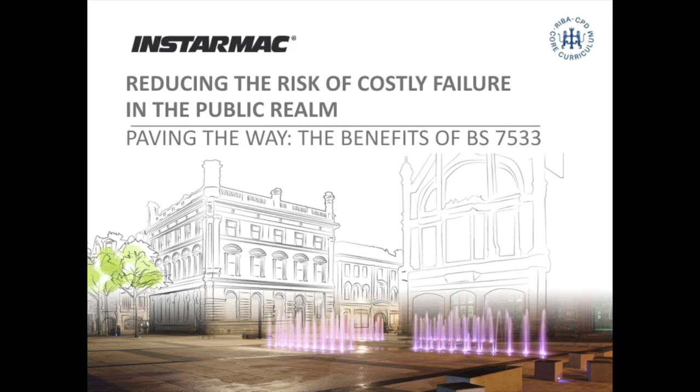Firstly, thank you for your time and welcome to this Instarmac CPD, reducing the risk of costly failure in the public realm, paving the way, the benefits of BS 7533. This seminar is intended to offer an overview of the benefits of using the British Standard 7533 for the design and construction of rigid or bound pavements in public realm works. We shall look at examples of high-quality paving where BS 7533 has been used successfully, and shall also illustrate some of the problems resulting from poor design or construction.

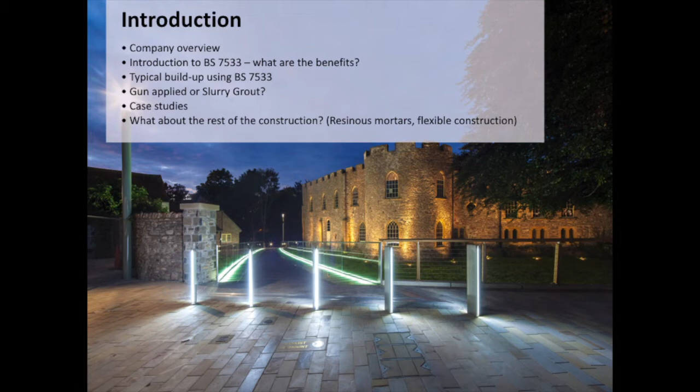We will review the basic principles of the standard and the guidance it provides for designing and constructing your paved area. We shall also look at some of the other considerations which can impact on the life and quality of your public realm construction.

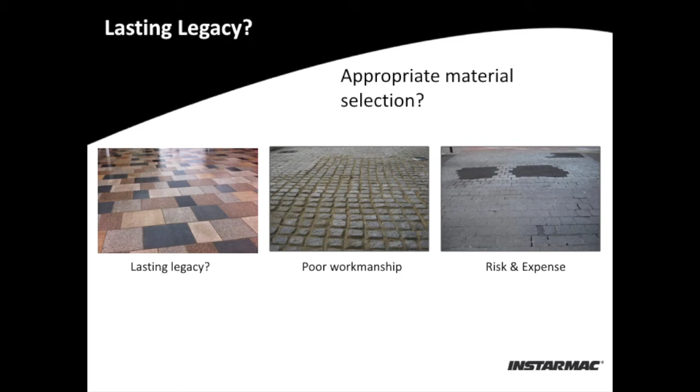BS 7533 has developed over approximately 20 years to offer clear, consistent and tested methods of design and construction. It offers advice through all layers of the construction, not just the mortars, and provides a tried and tested methodology for designing and constructing rigid paved areas. This ensures that your professional indemnity insurance is protected from risk and uncertainty. The British Standards Institution was founded in 1901 and is trusted throughout the world.

The British Standard 7533 compliance removes the uncertainty of site-batched mortars and offers a minimum of 40 years construction life. It can be used to design and build schemes in excess of 1,000 standard axles per day. Designing and constructing using the British Standard also helps protect your professional indemnity insurance.

Although the initial outlay may in some cases be lower, the ongoing and life cost of a non-compliant construction is generally significantly higher. The British Standard offers tried and tested guidelines and as such helps to reduce the risk to your professional indemnity insurance. This is not the case when using non-compliant materials. It offers a minimum 40-year construction life. Non-compliance cannot offer any minimum life expectancy.

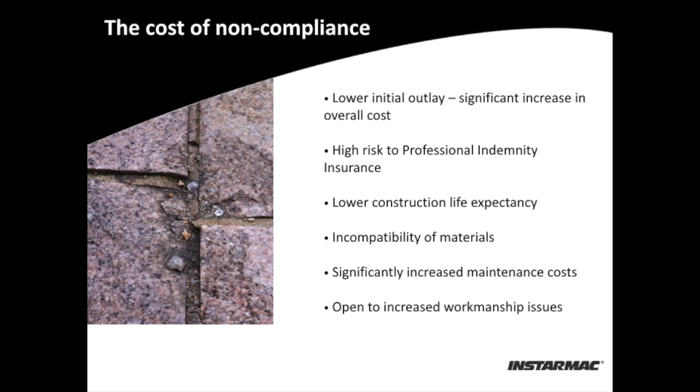One of the often overlooked aspects of the British Standard is that all the materials are tested in conjunction with one another, ensuring they work in harmony. A lower life expectancy also means an increase in ongoing maintenance, which can significantly increase the life cost of the construction. The British Standard provides technical and practical guidelines, which ensure that potential workmanship issues are minimised.

The only way to be certain that the products selected are compliant with the latest version of the British Standard is to ask for independent test results showing all aspects of Table C5 from a United Kingdom accredited service, commonly known as UKAS laboratory. Without independent verification, you may not be getting what you pay for.

It's important to understand the way some manufacturers will try to subvert the requirements of the standard, using claims such as manufactured to meet or manufactured in accordance with. Instead, look for certainty. For example, fully compliant and independently tested. The requirements of the standard are extremely strict and difficult to meet. Another strong indication that products you select are going to meet your requirements is to see some tried and tested results.

Cement production is a significant contributor to CO2 emissions, at approximately 750 kg of CO2 per tonne of cement produced. After water, concrete is the most widely used material worldwide, so any reduction in the impact of cement-based materials is positive. With this in mind, using BS 7533 is particularly relevant, given the extended life you can expect over more traditional build methods. A recent scheme in Wiltshire using BS 7533 compliance and eco mortars achieved a CEEQUAL Excellent Award.

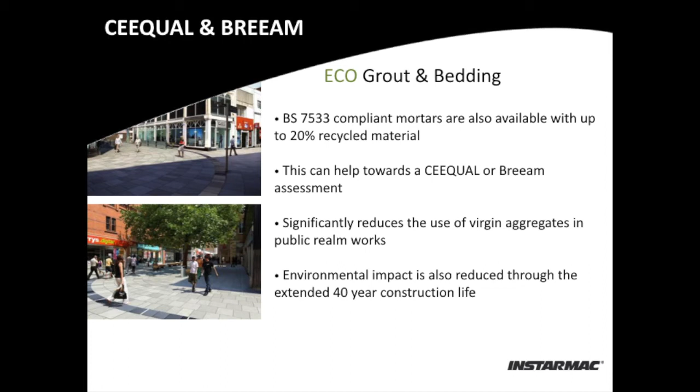CEEQUAL is the International Evidence-Based Sustainability Assessment Rating and Awards Scheme for civil engineering, infrastructure, landscaping, and works in public spaces. The subgrade is the bottom layer of the construction upon which the rest of the construction is built.

The capping layer is MOT Type 1 or DOT Type 1, DTP Type 1. Roadstone is installed as a consolidating layer above the subgrade to construct the road base, subbase upon. MOT is a subbase that is formed using recycled crushed concrete and consists of rubble of varying size, from 40 mm right down to dust, also known as DOT Type 1.

The road base, subbase is constructed using either C30 or C40 concrete or dense bitumen macadam. BS 7533 bedding mortar has to be extremely high strength, shrinkage compensated, and must also offer high adhesion qualities.

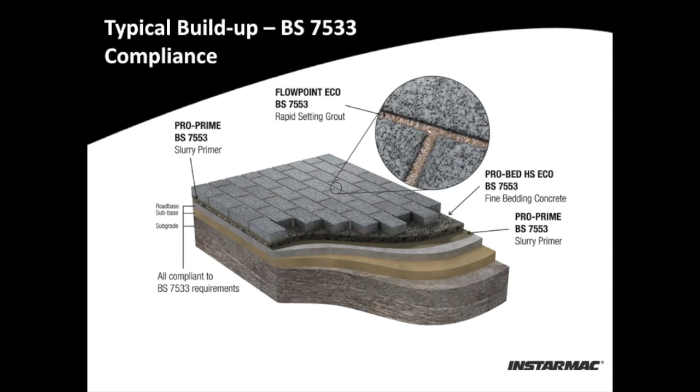California bearing ratio, also known as CBR, is a test used to determine the supportive value of the subgrade. The CBR value determines the depths of the road base and subgrade and ensures it is suitable to bear the load of the construction above. The capping layer is then installed and compacted, providing a suitable layer on which to construct the road base.

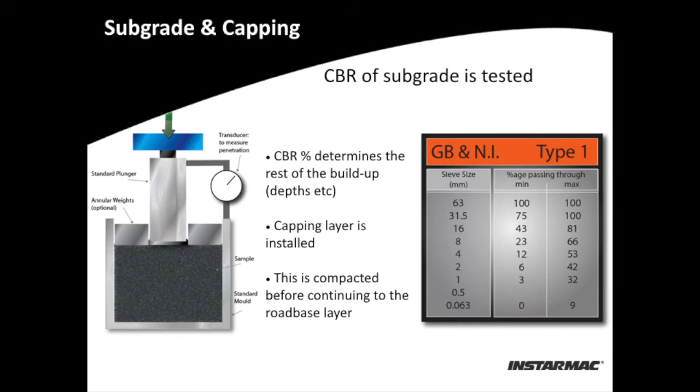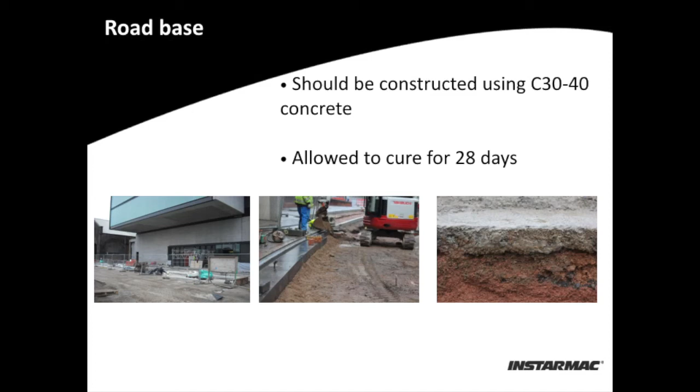The design should be based on an assessment of the subgrade bearing strength, CBR. The weaker the subgrade, the stronger the paving design above should be. Best practice is to construct the road base layer using a C30 or C40 concrete. This should be allowed to cure for a minimum of 28 days. Where this offends either the project program or cost, dense bitumen macadam can be considered.

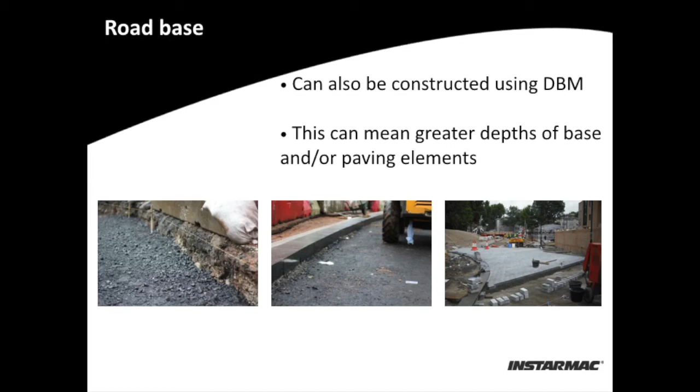Where DBM is to be considered, consideration should be given to both the depth of the road base and the depth of the paving. Although priming of the road base is not a specific requirement of the British standard, it has now become standard practice to prime at this layer. Priming ensures a high bond between the road base and bedding material. Debonding between these elements has been identified as a common cause of failure.

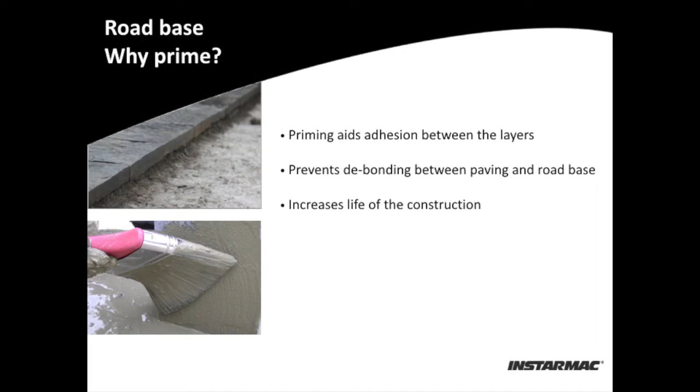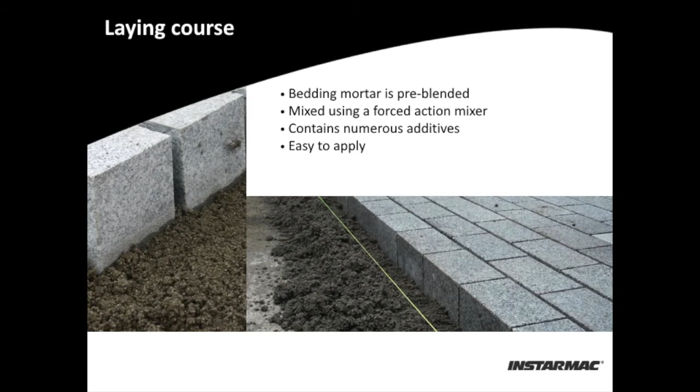The bedding mortar requires just the addition of water and is mixed in a forced action mixer or silo for larger volumes. The numerous additives control shrinkage, adhesion, flexural strength, and workability. Although the optimum bed depth is 35 mm, the bedding mortar can cope with depths of between 10 and 75 mm. Priming of the paving element increases the bond strength to approximately 2 newtons per millimetre squared, as per the latest requirement for compliance to the British standard. This prevents one of the most common causes of failure in public realm works.

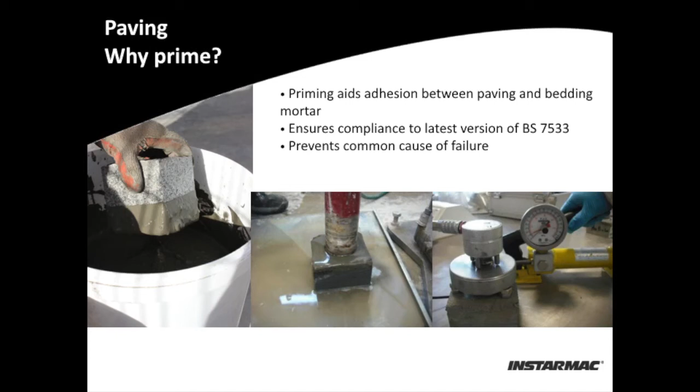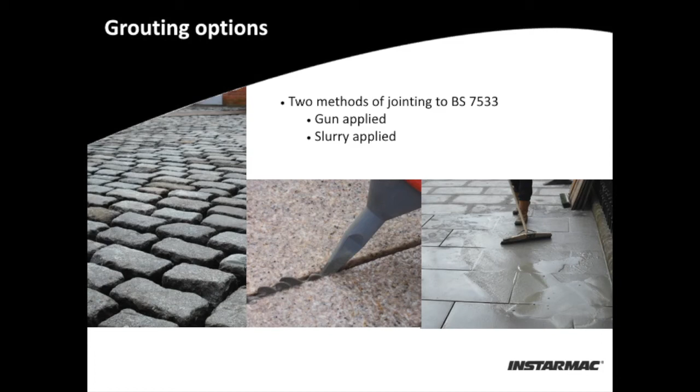There are 2 methods of jointing to BS 7533. The gun-injected method offers a more traditional struck joint finish, but is considerably more laborious. The slurry method is faster, more cost-effective, and more robust. Many clients worry unnecessarily about staining when considering slurry grouting.

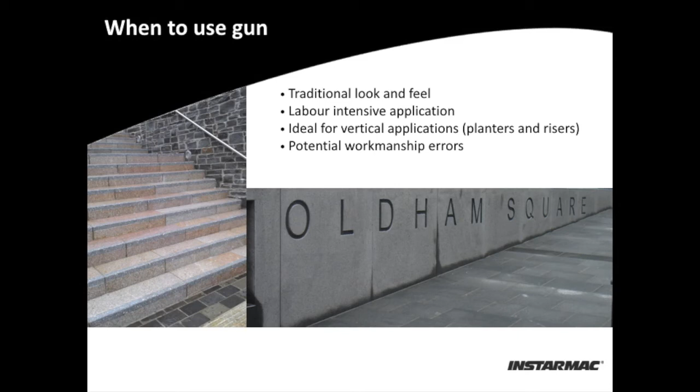Although gun-applied mortars are much more labour-intensive than their slurry counterparts, there are occasions such as vertical applications where it is the product of choice. There is a greater potential for workmanship errors, such as voids in the joint due to poor application using gun-applied mortars, and generally they require a lighter touch than slurry grouts.

Due to the application method, slurry grouting is fast and efficient, meaning large areas can be grouted quickly. Slurry grout can also be applied in less than perfect weather conditions, and its fast setting properties means it can be trafficked more quickly than traditional pointing methods. Voids in the joint, which are a major cause of failure, are avoided because of the application method, filling the joint from bottom to top.

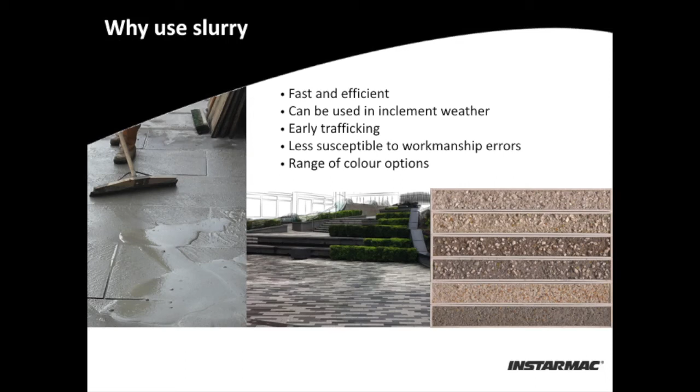BS 7533 is able to cope with extreme traffic conditions. The MOD tanks at Bovington Tank Facility required a surface suited to support upwards of 1,000 standard axles per day. Damaged concrete was removed to allow the installation of a versatile, polymer-modified cementitious mortar subbase. This mortar conforms to the strict demands of the BS 7533 specification for the rigid construction of streetscape works.

The granite setts employed to withstand the exceptional surface impact wear and tear were laid onto the subbase and grouted and secured with rapid setting grout. The high fluid consistency rapid set grout also conforms to the demands of BS 7533 and facilitates early trafficking. In addition to its exceptional bond strength, it has an initial set time of just 30 minutes, can accept foot traffic after 1 hour and vehicular traffic after 36 hours.

The grout, which is also mixed with water on site, is able to fill joint widths from 5 to 50 mm and joint depths of 200 mm in one pour. As part of a follow-up site visit, it was found that although having been subjected to significant impact from an array of heavy-duty army vehicles for more than 4 years, virtually no degeneration had resulted.

One of the largest public realm paving schemes in Europe, the new home of the BBC in the northwest, required approximately 40,000 metres squared of paving. Over 2,000 tonnes of bedding mortar was supplied in bulk silos, which provided a perfect base for the stone to be laid on. Slurry primer and flowable rapid setting grout were also used throughout the development.

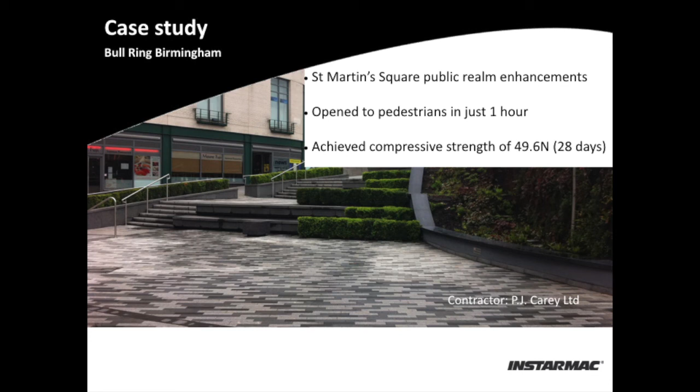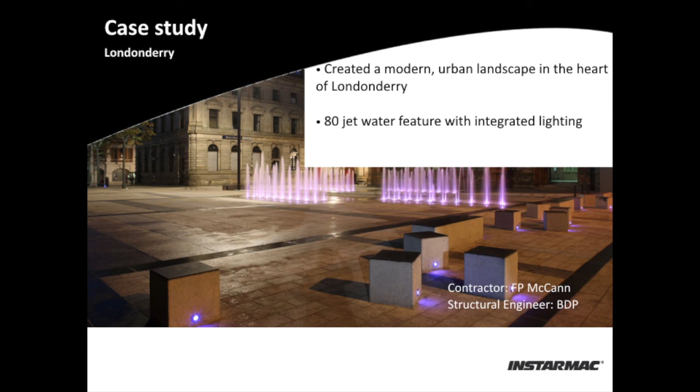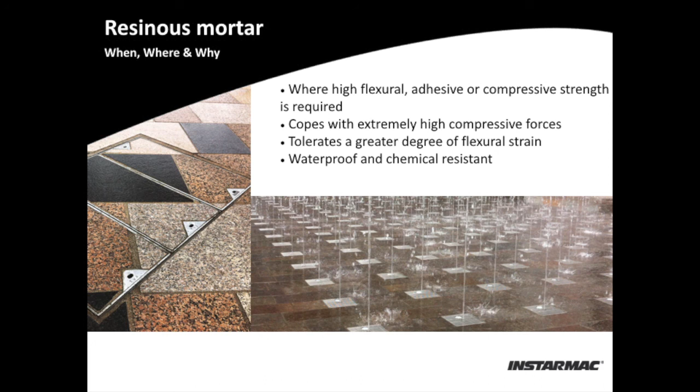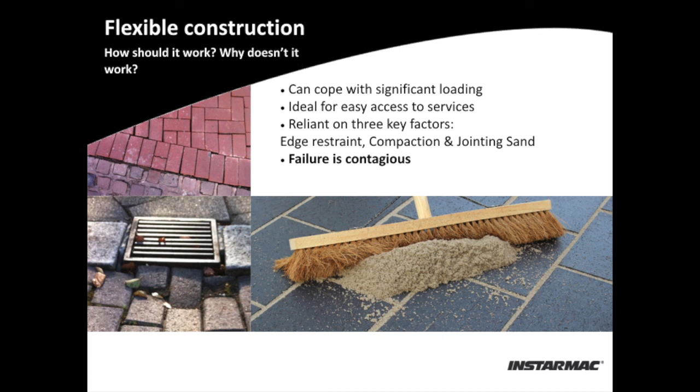Although flexible construction when installed correctly can cope with significant loads, when failure occurs, it can spread quickly. Without adequate edge restraint or compaction, failure will occur quickly. Loss of jointing sand is a significant cause of longer-term failure and can be caused through normal use, particularly through aggressive cleaning. Jointing sand is often washed out through aggressive cleaning, but can also be removed through normal use, such as dripping from hanging baskets and guttering.